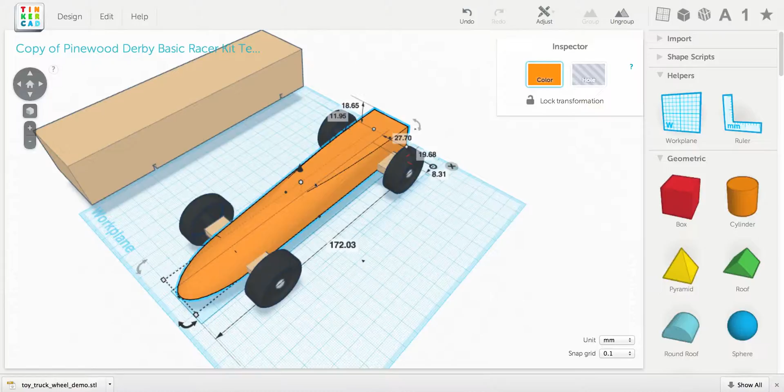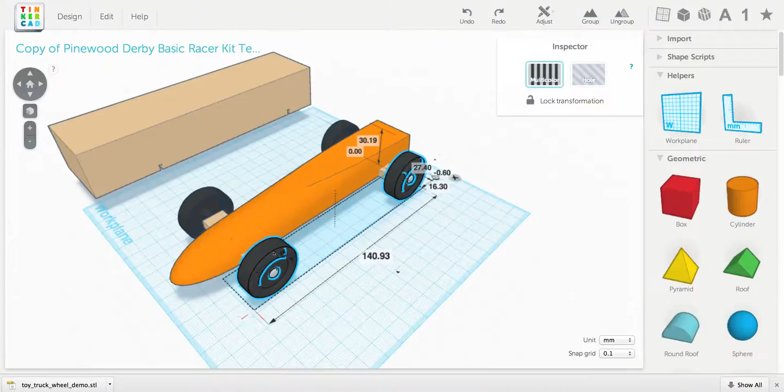Now, we're not done yet. I'm going to move the body off to the side. Actually, I don't need to do that. Let me undo that move. What we need to do is move the wheels off to the side. So I'm going to move them directly off to the side by selecting them and shift dragging them so that they're moved right off to the side. That gives us room to look at the inside of the axles here.

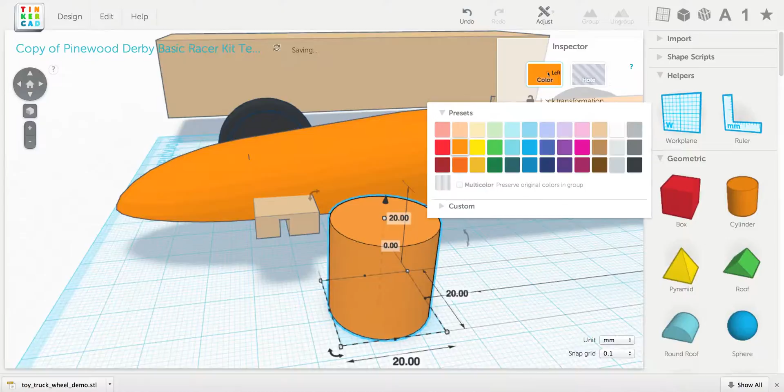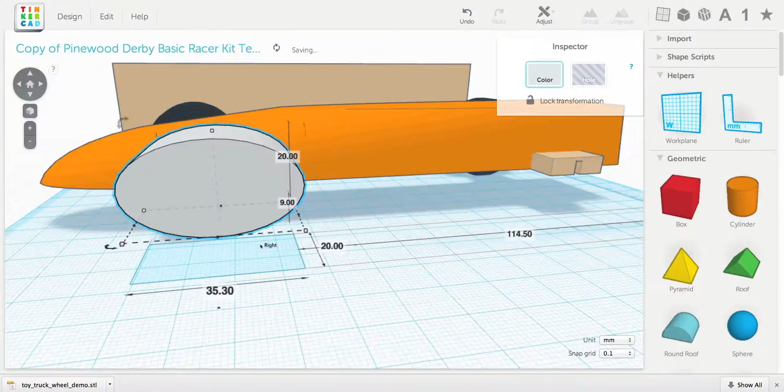We need to add wings to this, so we're going to do that by bringing out a cylinder. Let me change the color. Rotate it 90 degrees. And then do a non-uniform scale. And start moving it into position. I can temporarily turn it into a hole so that I can see the stuff behind it.

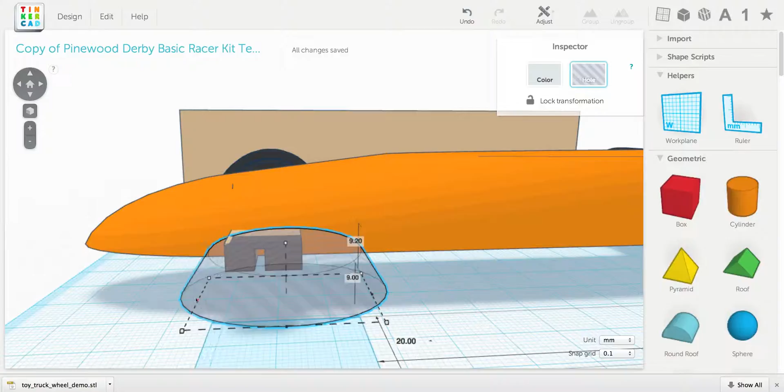And I want to make sure that it is completely overlapping the axle we have, which is why we cut it down so short. So we had plenty of room to work with the wing here. And we're just going to keep tweaking it until it looks right.

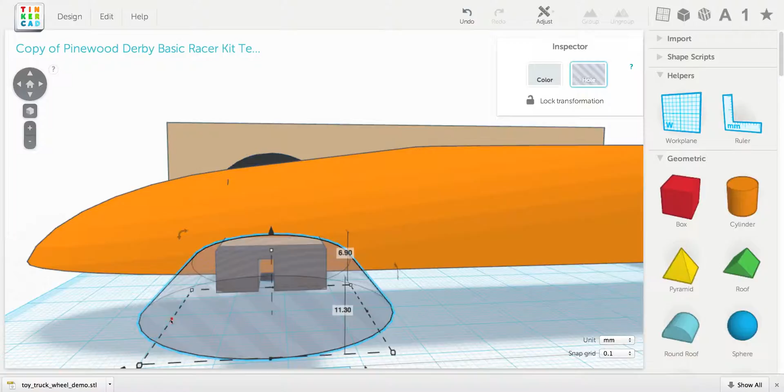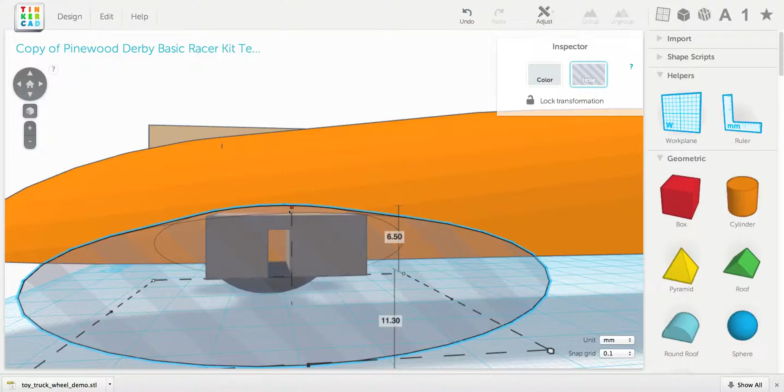Can't have any corners that aren't all the way inside this wing. So there's any corners poking out like that, and I haven't got it right yet. Okie dokie.

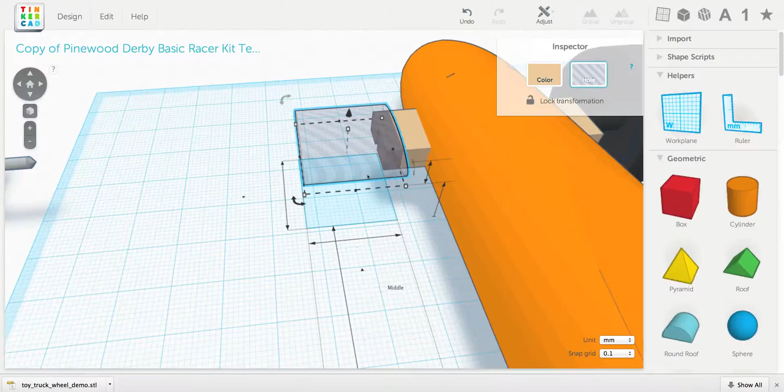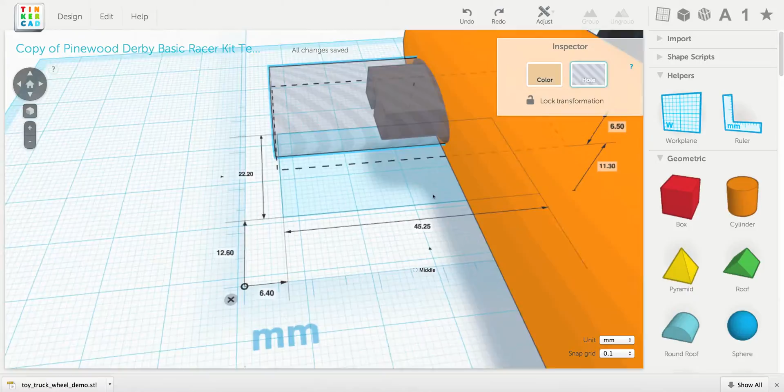Now, I want it to be the exact same width as the block. So let's remind ourselves how wide that template is. It's 45.25. So we need this to be also, let's move the ruler actually to right there. And 45.25. I didn't want to do that. And I'm going to want to move this over the same distance as the block.

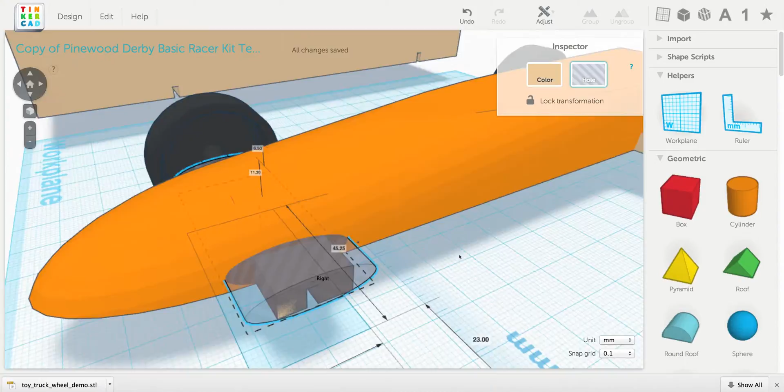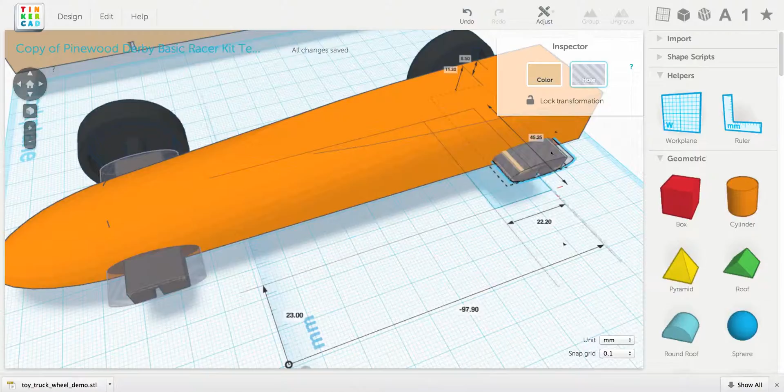So the block is exactly 23 millimeters away from the ruler. And so I need to make this match. So 23 millimeters away. Exactly the same width and lined up right beside, right flush against the wheel we already have, and that's exactly what we want. I'm going to duplicate that, edit, duplicate, and shift slide it down until it covers the back one.

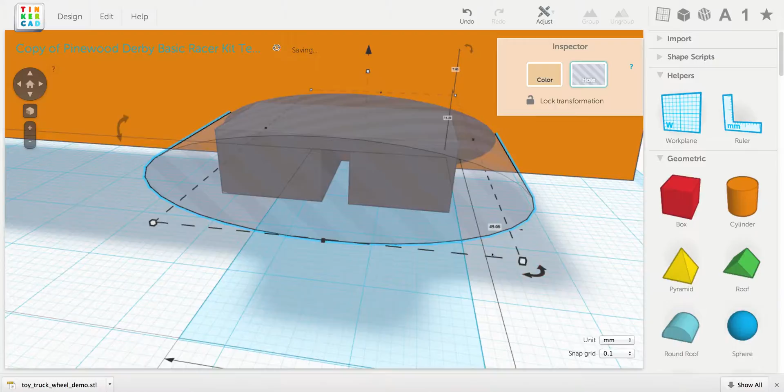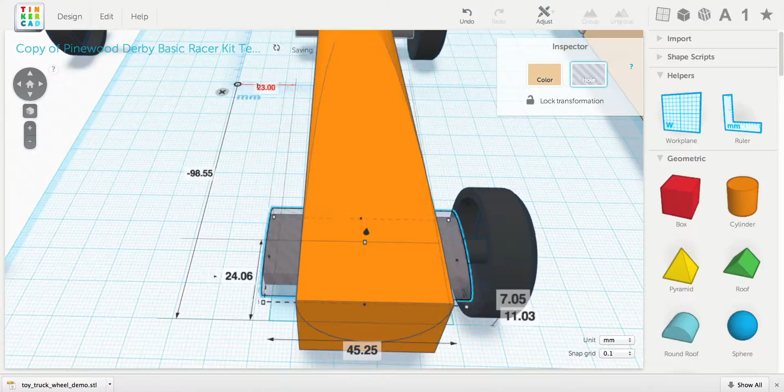Now it looks like for the back one, the wings need to be a little bit bigger. So I need to do a uniform scale, make it bigger. Little changes at a time to get this right. Now, because I did a uniform scale, it's too wide. So 45.25, and the block is, again, 23 millimeters away. So this needs to be 23 millimeters away. And there it is lined up.

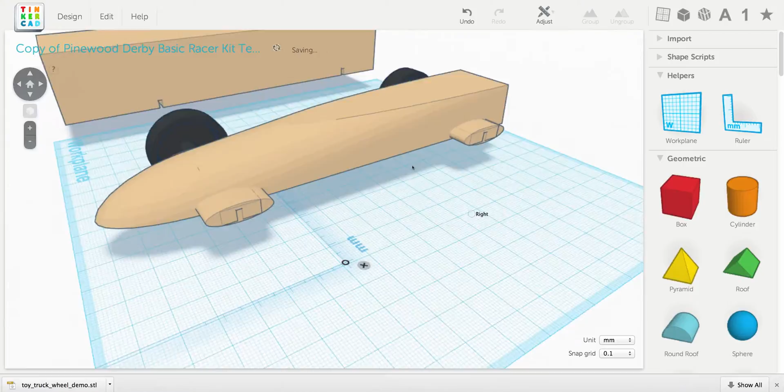Great, now these don't need to be holes anymore. Let's pick a color. We can make the wings that wood color as well. Change the body now to be the wood color and move the wheels back by shift sliding them.

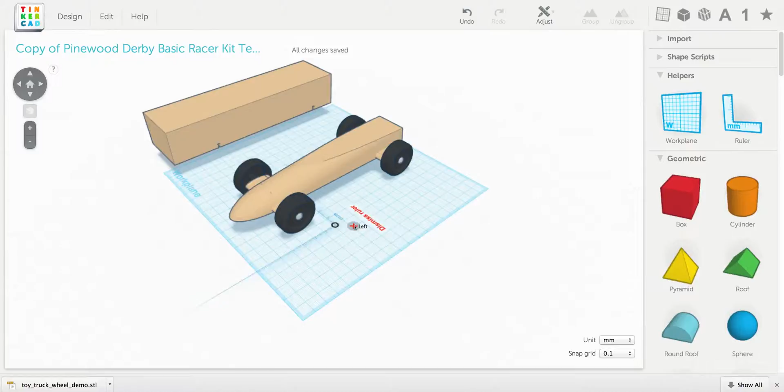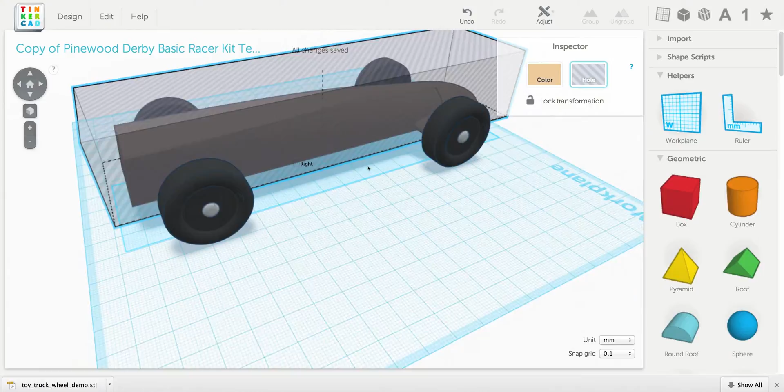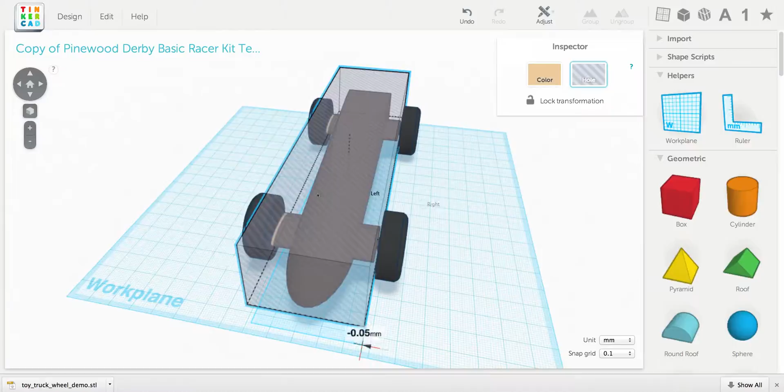Okay, I'm going to turn this one into a hole temporarily and move it over. And I just want to confirm that there is nothing sticking out. But what do we have here? We have the wings sticking out underneath. So, it's important to check, isn't it? I'm going to, let's see, add a ruler. And remember, that's 11.95.

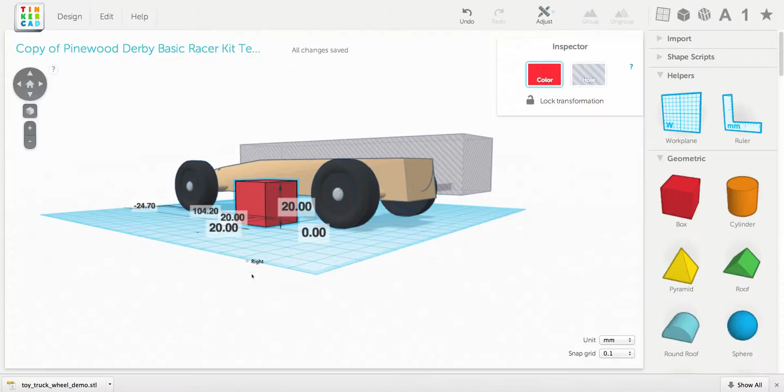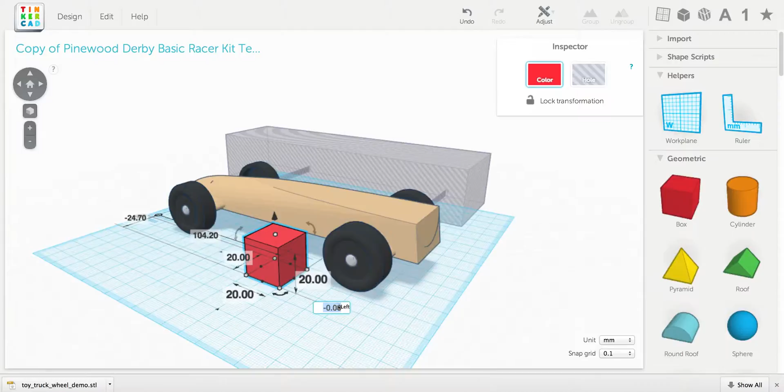So I want the top of this to be lined up with the bottom. So that is 20 minus 11.95. Or 11.95 minus 20, minus 8.05. So instead of 0, make sure I got the right 0 going on there. Instead of 0, we want minus 8.05. Not 80.5. 8.05. There we are.

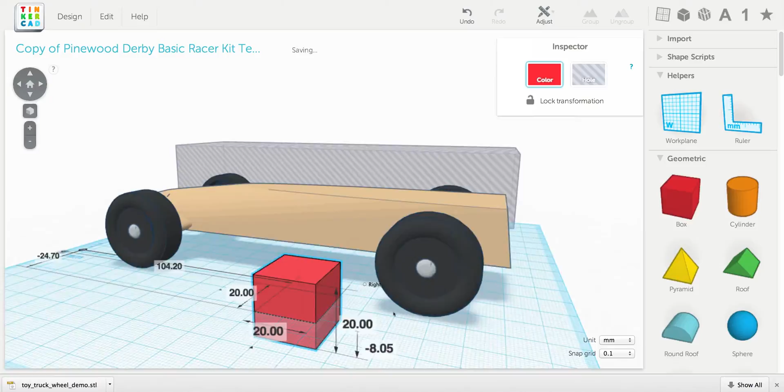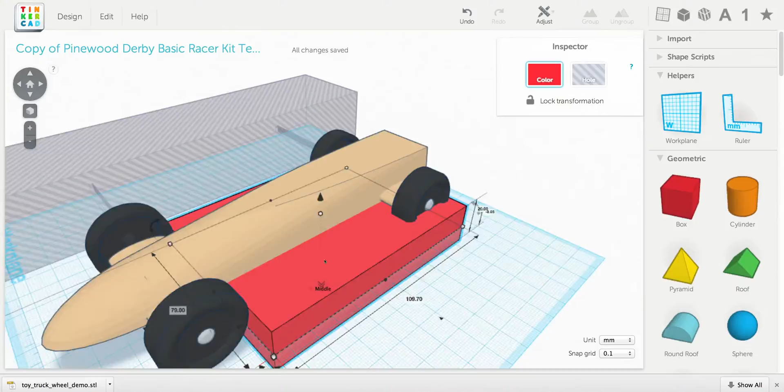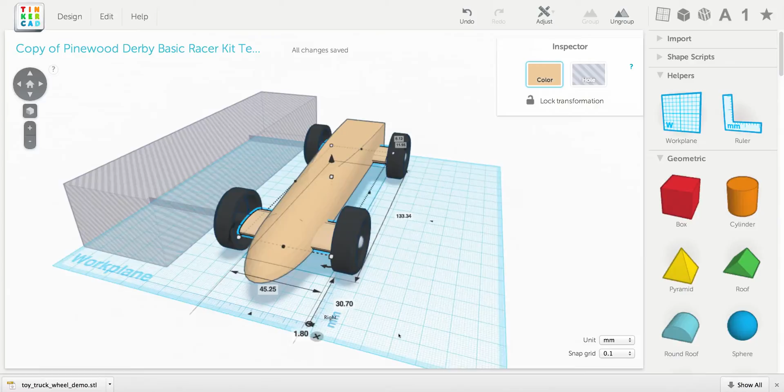Okay, so now I can do some non-uniform scaling. And I just need to overlap the wings, right? Okay, so turn that into a hole. Select it along with both of the wings and group. And now if we look underneath, the wings are not extending down below the bottom of the car. Awesome.

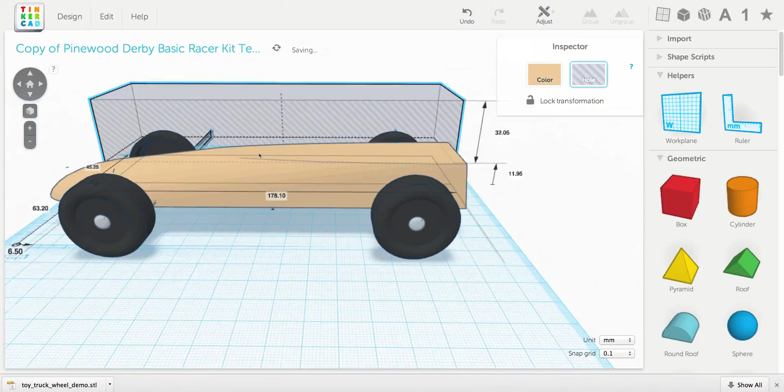Don't need the reference anymore, so I can delete that. Get rid of the ruler, and there we are.

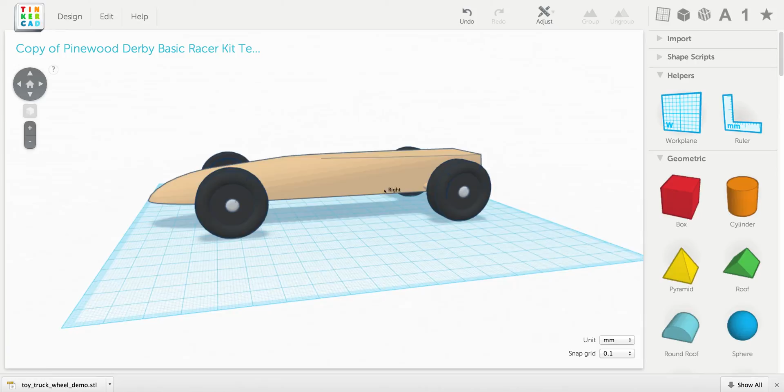Now, if you wanted to go crazy and add some cool stuff, maybe like a recess down here for the driver to sit in, add a windshield, add some fins or a spoiler or something on down here, knock yourself out. This is your car now. Have fun. Make some changes. And then try again using these techniques and make your own design.